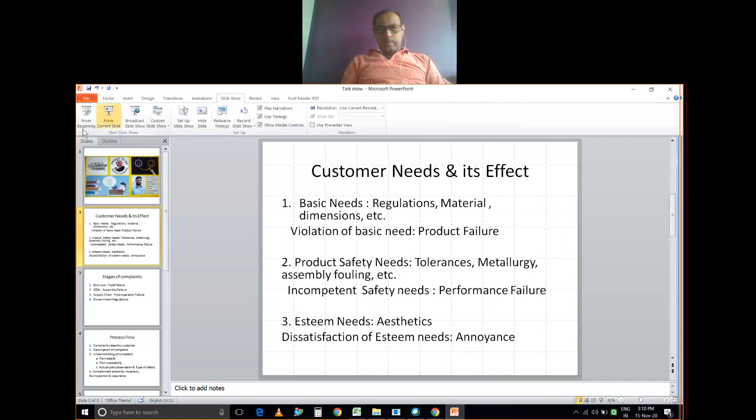As far as my opinion, there are basically three types of customer needs. The first is the basic need, which includes regulations, material, and dimensional aspects of the part. If we violate these basic needs, it contributes to product failure. So we have to satisfy these basic needs on top priority.

Another is product safety needs, which includes tolerances, metallurgical aspects, assembly fouling, etc. If we are incompetent for these safety needs, then it comes under performance failure.

The third one, which is right now a demanding aspect from our customer, is esteem needs. The first two needs are a must for us; if we violate them, it is ultimately a product failure. So we could not have any tolerance to violate the first two needs.

But right now customers are demanding esteem needs like aesthetics—for example, paint issues, burrs, damages—which create annoyance to the customer. So we can say that dissatisfaction of esteem needs creates annoyance. Right now, these aspects are also being considered as customer complaints.

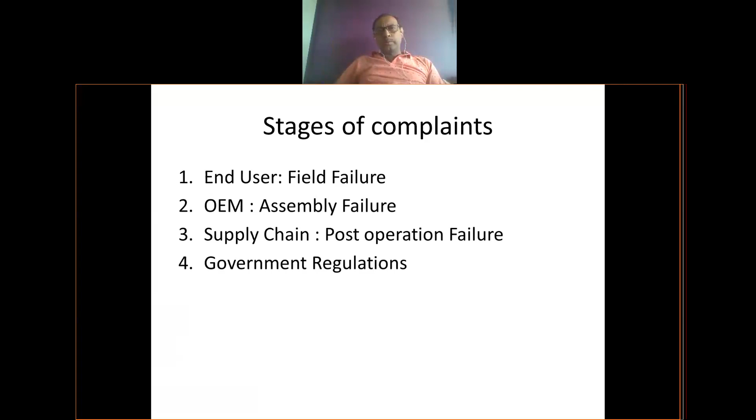Okay, now I move to a major part of customer complaint - that is, how to handle it effectively. What are the ways of handling it, and what process or methodology we can follow for handling the customer complaint.

Yes, there are many strategies to handle customer complaints. It varies from customer to customer, organization to organization. But we can generally follow 8D formats and CAPA formats. Yes, it is a standard process.

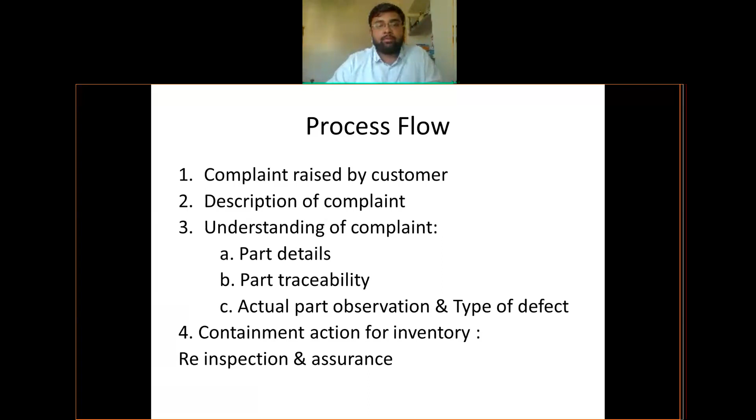Then we come to the type of defect, what actually happened at their end. Then the fourth part is containment action for inventory. If one part gets NC observed at a customer end, all the inventory must be reinspected and assured that it is not with that defect. So containment action should be taken. Then the main two things are why the part shipped. We have to get the answer for why the parts are shipped to the customer and why it is made at our end. These two answers contribute a lot in customer complaint handling.

Why shipped gives us the detection failure - what happened at our quality gate that the NC part got dispatched to the customer. So why shipped, then why made. Why was this part made at our end? Why has this been manufactured? So it gives the occurrence failure root cause.

These two root causes give us directly the action. We can get the corrective action and then the preventive action. Corrective action is for whatever happened, we have to scrutinize for that part. But preventive action is what to make to avoid its reoccurrence. And ultimately, monitoring the effectiveness of the action is a key thing.

What is the difference when you handle any customer complaint from OEMs or any other customer who is non-OEM? Is there any difference there? Because you have been dealing with a lot of OEMs, what is the challenge when you are really handling the customer complaint from any OEM, or what is the difference between the actions or the methodology when we are not dealing with OEM customers?

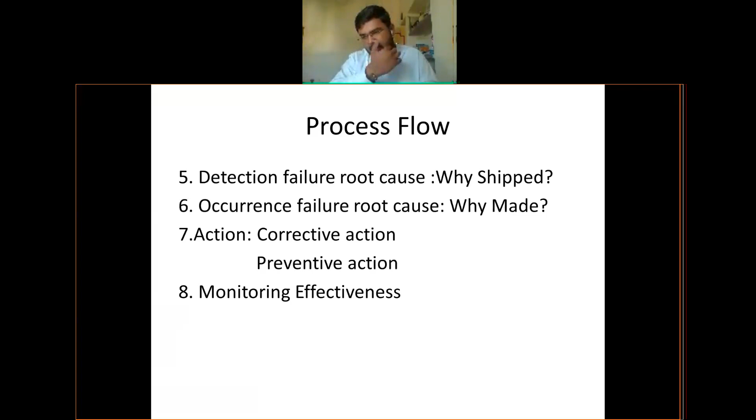Frankly speaking, non-OEM customers generally go with a non-systematic way. They just go with fishbone diagram or 7QC tools. They are enough with that analysis. They are not generally that careful for analysis on our end. They are just saying give me the okay parts and the root cause of these happenings. So that is basically the difference.

But OEMs go with preventive action and they monitor the action in their audits. Yes, so it is true that they monitor the actions in their audits. So what is the challenge? Which is the challenging path for the supplier to handle - is it the OEM or non-OEM? Where does the real challenge come from? Of course, the OEM. Yes, of course, the OEM.

When can we say the customer complaint is effectively closed? Effectiveness for a customer - I can say when he finds that whatever action or root cause has come at your end is capable enough to handle this issue, then for the customer the issue gets closed. But for us, first we have to assure all the inventory is free from that defect or issue. And second is monitoring the effectiveness of our preventive action. If our preventive action is not capable enough to avoid the reoccurrence, then we cannot say the customer complaint is closed at our end.

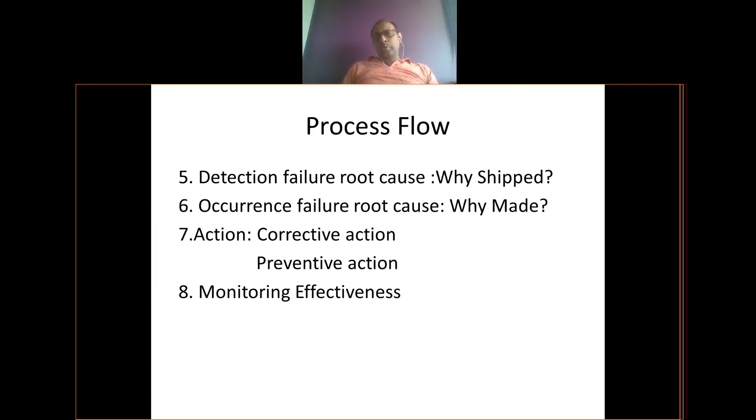Okay Prasad, I have two last questions. One is regarding customer complaint relation with customer satisfaction. Is there any real relation between those things? There are cases where customer complaints exist but still the customer is satisfied with your performance, or there are customer complaints and hence the customer is not satisfied with your performance. What is your experience? How do you look at this particular aspect?

It depends on the type of complaint. For example, just like I shared the experience of damaging of parts - in that case the customer raised the complaint, but ultimately he knows it is not a technical issue, so he is satisfied with me. He is demanding some infrastructure, some proactive approach, and all that. So even though two customer complaints have been raised, he is still satisfied with my performance.

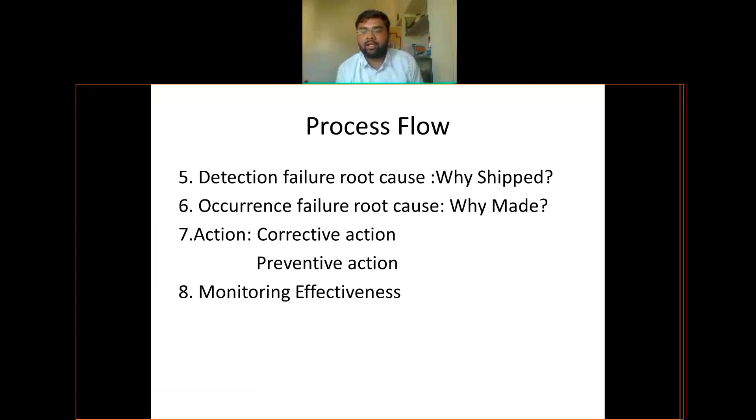But if, as I said, we have violated the first two things - the basic need and product safety - if material issues or some dimensional issues or metallurgical aspects have happened, then ultimately the customer will not rely on your performance. Definitely it violates your reliability towards the customer. But yes, for esteem needs, he may give you that much tolerance. He is satisfied with you on the basis of your dispatch volumes and other quality aspects. But yes, he is satisfied.

You just talked about volumes, dispatch volumes. Is supplying less quantity another customer complaint? Can we take it as less quantity dispatch, or not being able to fulfill customer requirements in terms of numbers or volumes - is that another customer complaint? No, supplying a lower number of volumes is not a quality issue, it is a supply chain issue. So it could not be a customer complaint.

It is part of a service, but it could not be a customer complaint in terms of quality—it is not like that.

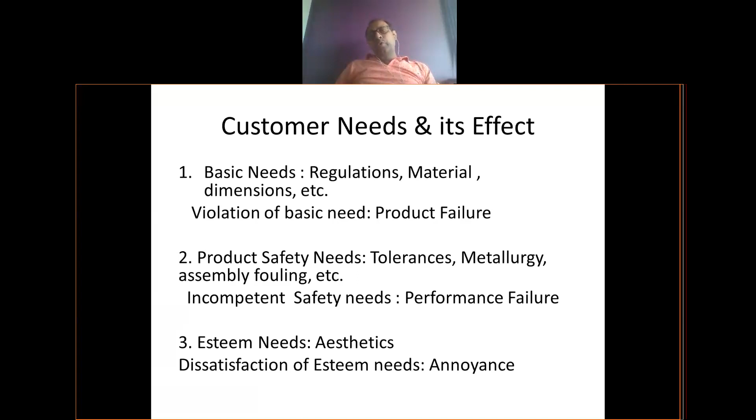Prasad, I have a last question. We've talked a lot about customer complaints and the methodology, sustenance, action plan, everything. I just want to understand what is the role of top management in all this, in this process. Where is the top management? How should he be leading from the front, how should he take it in this process, what his role will be. What is happening right now and what should happen for the betterment.

Usually, from my perspective, top management must involve and directly monitor the customer complaints, because when a complaint gets raised, it affects both commercially as well as performance-wise on the business of the organization.

As we know, the 1-10-100 rule: if the parts get rejected at our end, it costs 1 rupee; if it gets rejected at the customer end, it costs us 10 rupees; if it is hampered as a field failure, it will cost us 100 rupees.

So commercially it is a violation, and when performance continuously goes down, customers start searching for another supplier. It hampers the business also. So top management must have their eyes on customer complaints—that is the first thing.

The second aspect is how to resolve the thing. Generally, whoever the customer may be, they need assurance that the part should not get made with that much NC. So sometimes we need to introduce new infrastructure, new methodologies, new poka-yokes, and train people periodically for that aspect. So it all involves cost.

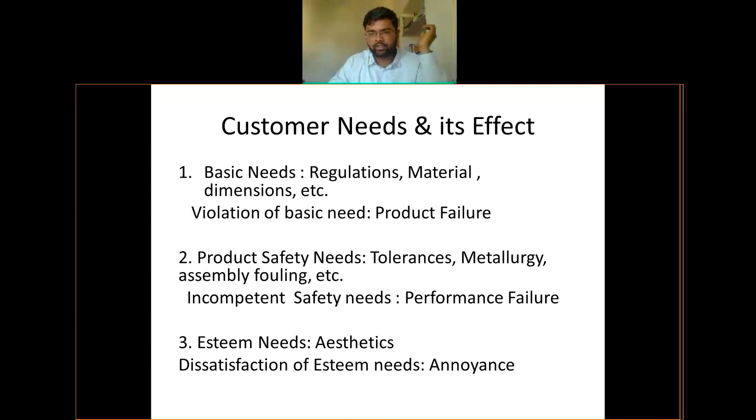It is on an approximation basis, but yes, we can demand if the problem is that severe, or if we could not get the problem just by seeing the photos or reading the mails, then yes, we can demand extra time from them.

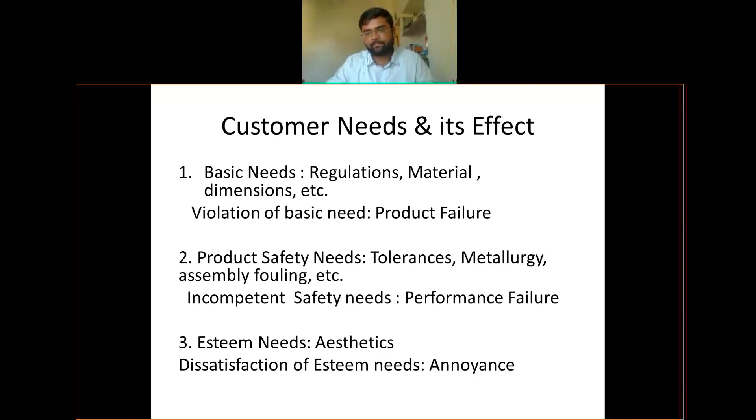Ultimately, the goal is the customer wants the okay product, and we need to sell the product and generate revenue—that is the basic thing. For that, you have to decide your procedure by conveying it to the customer. If you say it so, he will give it so. But yes, you have to prove that you are doing a technically sound thing to avoid that customer complaint.